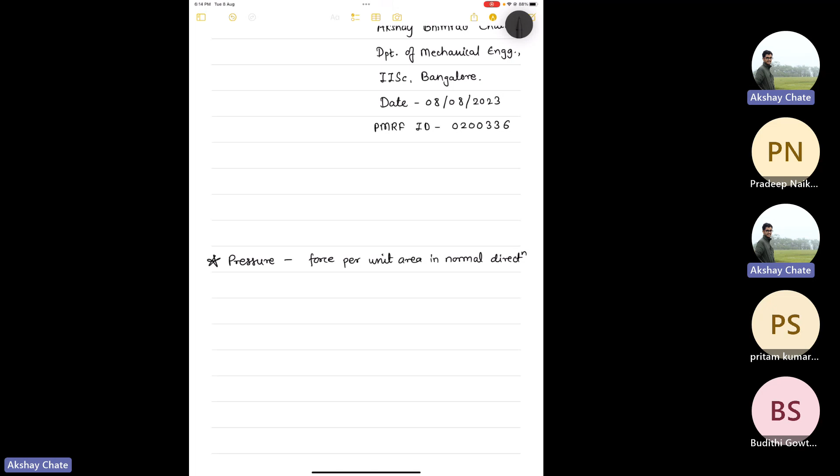So since we are discussing fluid statics, we have to discuss pressure because this is very famous: Pascal's law. Pascal's law says that when your fluid is at rest, pressure is the same at all points in the fluid. So that is Pascal's law. I hope you know that. First we finish the pressure. The definition is like this, and you should know some more things about pressure.

Pressure is scalar, because it is always... sorry, before I put it as a scalar thing, first I should mention that pressure is always compressive in nature. So when you say some pressure is exerted on something, it will always try to compress that thing. It won't be tensile or elongation. That would be a tensile force.

And therefore, as per Pascal's law, when the fluid is at rest, it has no direction. It is the same at all points, right? So you can assume it has no particular direction. So it is not a vector, it is a scalar. Therefore, pressure is defined as a scalar quantity. And there are standard units for defining pressure. One is Pascal, then there is bar, then there is torr.

But sir, it is always normal, so it has a direction, is it not? Since it acts normally, pressure is always normal to the object, so it should have direction also. So I should be careful with defining this. When I say it is a scalar, that is only valid for statics, and I am talking about inside the fluid domain.

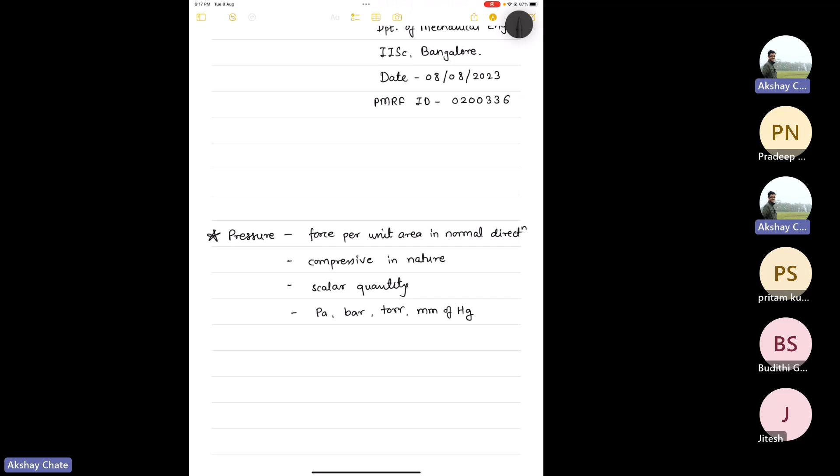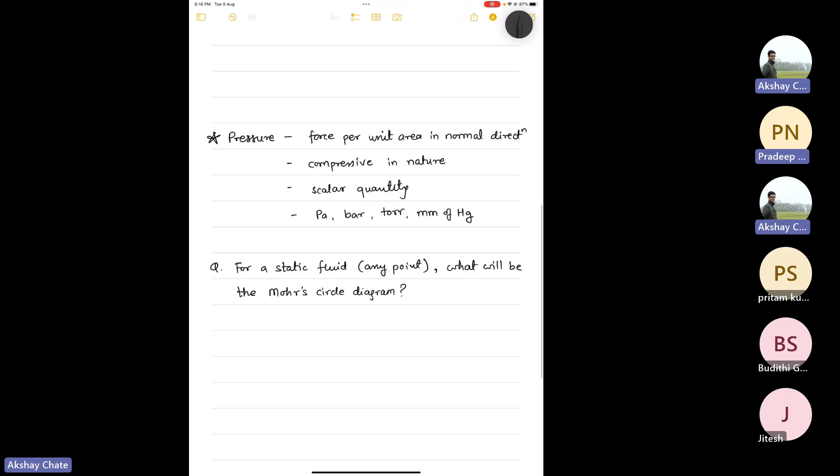So there is one very famous question: for any point inside a static fluid, what will be the Mohr's circle diagram? For those who don't know, Mohr's circle is used in solid mechanics to determine the resultant stress acting on any plane at any angle or orientation. It is a two-dimensional graph where on the x-axis you plot normal stress and on the y-axis you plot shear stress.

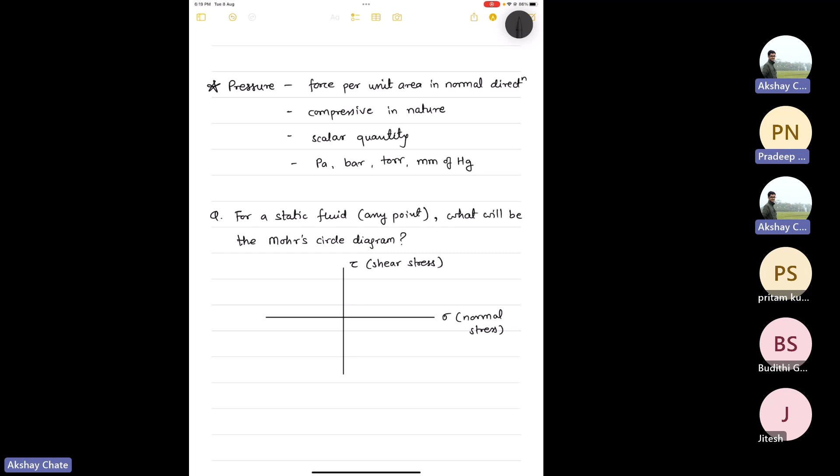Depending on how much normal stress and shear stress is applied at a particular location in a solid, you draw a Mohr's circle diagram, and typically it looks like a circle. I cannot go into depth because this is a fluid mechanics class. But the point is, this type of question is a combination of fluid statics and solid mechanics. If you know it, fine; if you don't, that is also fine.

The thing you should note down is on the x-axis we plot normal stress and on the y-axis we plot shear stress. So now, let's consider any point or some fluid domain like this.

So at any point inside the fluid, let's consider this point. If you see the direction of pressure, it is always compressive in nature, right? So it will be exerting force, pressure in this direction, always compressing it. And since this is a fluid at rest, there is no relative motion between the particles. So there will be no shear stress.

So now we know that this tau axis or y axis will be zero value. So our Mohr's circle diagram can only be a line or a point. It cannot be a circle because there is no shear stress. Now the next question is, when you consider normal stress, if you consider this as the origin, to the left of the origin it is compressive stress, on the right side of the origin it is tensile stress. So as we can see, pressure is always compressive.

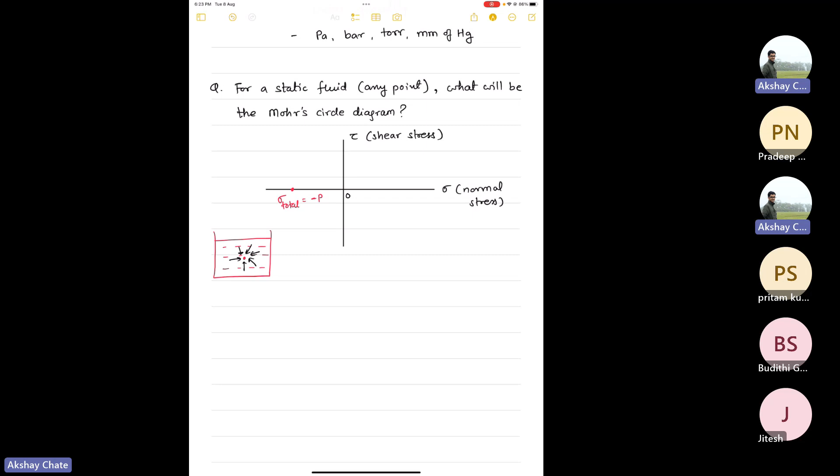Yeah, so see, this Pascal's law. We understand that pressure inside a fluid which is at rest is always the same at all points, but it has a very important application. So I'll just draw a simple schematic of it. You might have heard of something called hydraulics. I'll just draw a simple one.

Pradeep, one request: when you are not asking, can you just mute yourself because some background noise is coming. Yeah, thank you.

So what happens in many practical applications, you have a continuous system or fluid domain like this, and, for example, if you want to lift a car, a car is quite a heavy object, and to lift the whole car is not easy, at least manually. So you can use Pascal's law. And this will be a continuous same fluid all throughout.

So here, when you apply some force on this small cross-sectional area a, and this is the bigger cross-sectional area capital A, the particle inside the fluid will experience pressure because of the application of force, and that pressure will be compressive in nature, force per unit area. And the same pressure is transmitted throughout the domain at all points because the fluid is at rest, there is no relative motion in it. So at the other end, where the car is to be pushed up, the pressure will be the same, acting on this bigger area, and it can lift, let's say, mass of the car m.

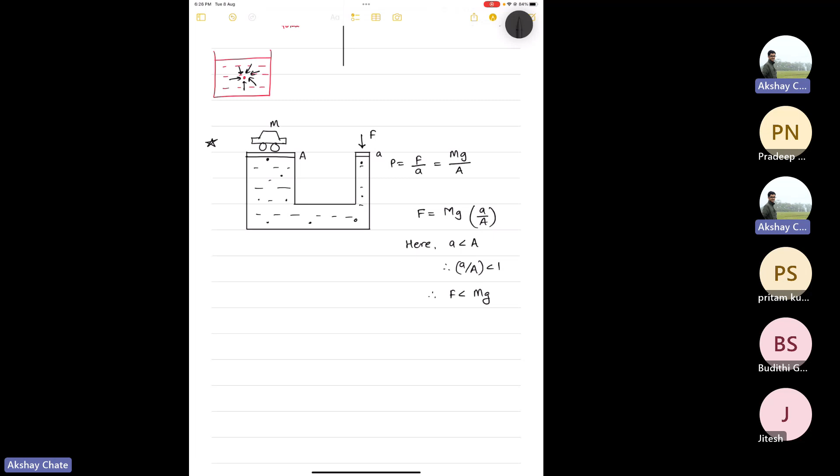So then sometimes they ask the validity of Pascal's law.

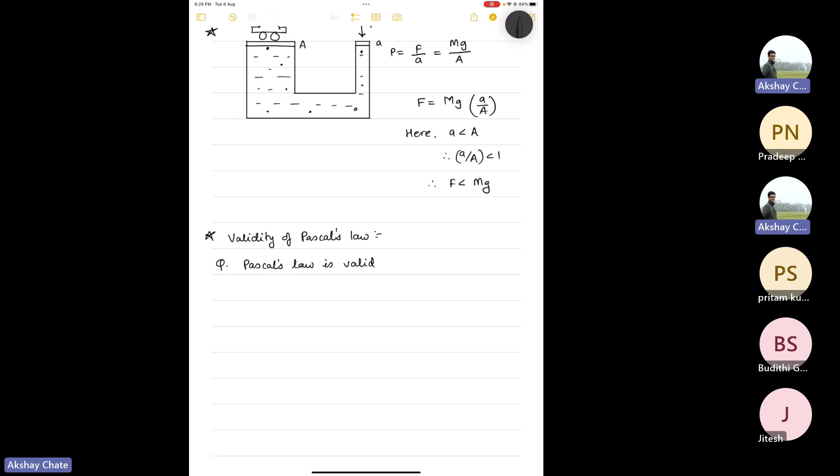So they will try to trick. The question may be, for example, I'll just give a question: Pascal's law is valid for... So there will be options like compressible fluids. Then there will be an option like non-Newtonian fluids. This we discussed in the last class.

Okay, this non-Newtonian. There are different types of fluids. The major fluids that are observed on the Earth's surface are water and air. They come under the Newtonian class of fluids. But there are some fluids which are non-Newtonian. You can go to the last class and see the notes or see the video. Then you'll understand what non-Newtonian fluids are. There are different types like Bingham plastic, thixotropic, something like that.

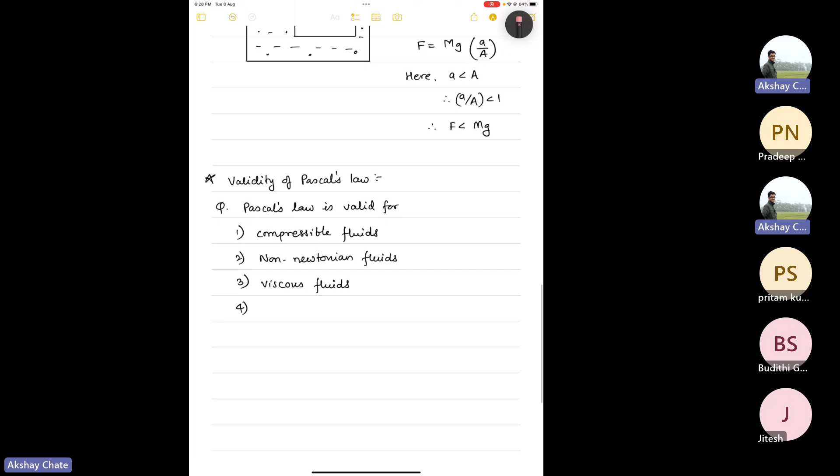So there are 2-3 types which are non-Newtonian, and maybe another option could be, let's say, viscous fluids, and the last one can be incompressible fluids. So, can anybody give me the correct answer for this question? Anyone? Budithi or anybody? I'm just seeing the name and that's why I'm calling. Is it incompressible, sir? Okay, so we have an answer which says option number 4, incompressible. Anybody else wants to take a shot at this?

Okay, so the thing is, the answer is actually all of the above, because Pascal's law doesn't say what type of fluid. It just says the fluid must be at rest or there must be no relative motion between fluid particles or molecules, whatever you want to write. But the idea is Pascal's law is independent of the type of fluid, independent of compressibility or incompressibility. As long as the fluid is at rest or there is no relative motion between its particles, it is valid. So actually this question is wrong.

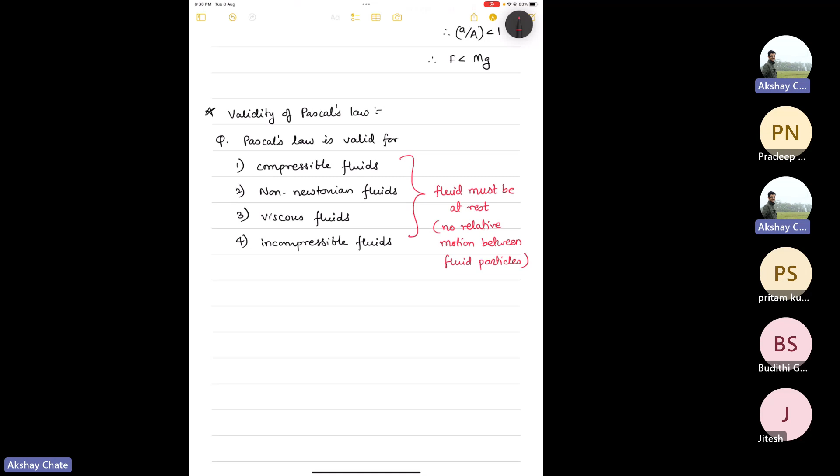The question should be: if the fluid is at rest, then Pascal's law is valid for what type of fluids, and the answer is all of the above. So that was a trick there. Actually, when I say the fluid must be at rest, everybody understands. That will be a stationary fluid in a tank or some container. But when I say there is no relative motion between fluid particles, a different case comes into the picture. Let's say, I'll just write the title: container and fluid moving with constant velocity.

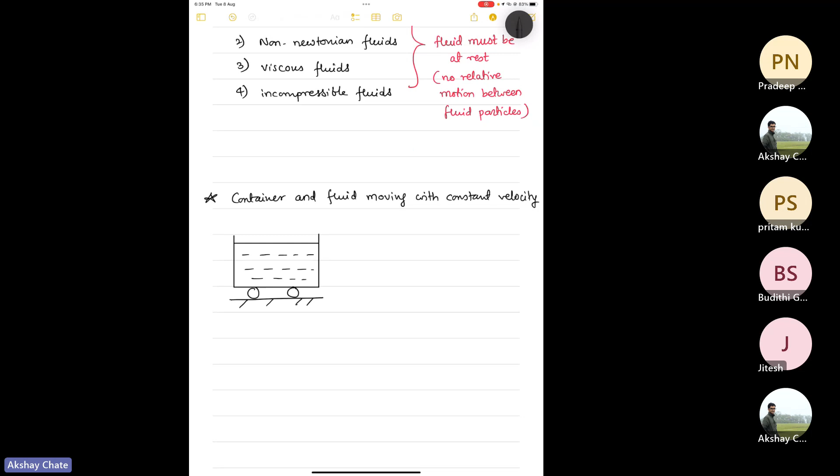Am I audible? Anyone? Oh, yes, sir. Yeah, actually, I was using Wi-Fi and it got disconnected in between. I'll just share my screen again. 1 second. I hope my screen is visible again. Yeah, visible. This meeting recording is going on, right? Yeah. Okay. Sorry for this internet issue. It was not my problem anyway.

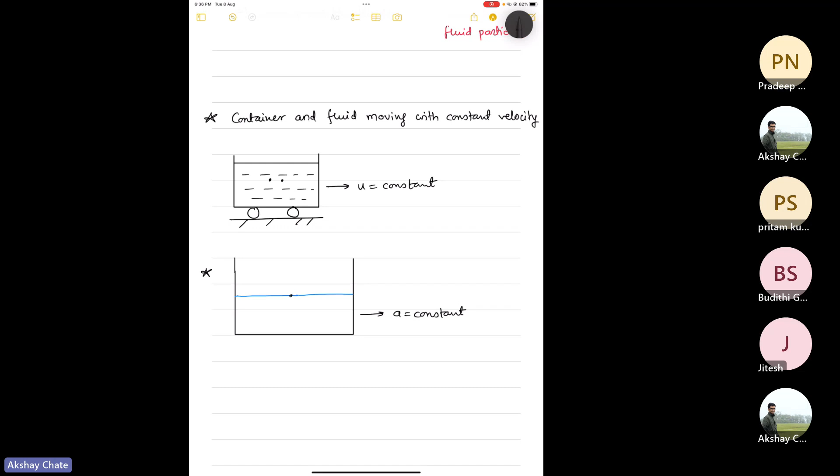So the first case is when your container and fluid are moving with a constant velocity, let's say velocity u. In that case also, there is no relative motion between two particles inside this fluid domain, so Pascal's law is valid in this case. Then there is a case where you have the same container, and let's say this was your initial level of fluid, and then it started moving at a constant linear acceleration. So in the first case your velocity was constant, and in this case your acceleration is constant. When your vehicle accelerates at a constant acceleration, the liquid level will not stay horizontal. The liquid will shift slightly to the backside because of the acceleration.

Pradeep, can you just mute yourself for a second? Background noise is coming.

So in this case also there is no relative motion between two particles inside the fluid, and therefore Pascal's law is valid for this case also. But not all motions are linear, or in an XYZ direction. There can be rotational motions also. So I'll just give you two cases. There is a container like this, a cylindrical container.

Please forgive my drawing. One case could be... 1 second. Yeah. So there are two cases in case of rotational motion. So one case is you have a cylinder, and it is having constant angular motion. For example, if this is its axis of rotation, let's say it is rotating about this axis, and if it is rotating with a constant angular velocity omega,

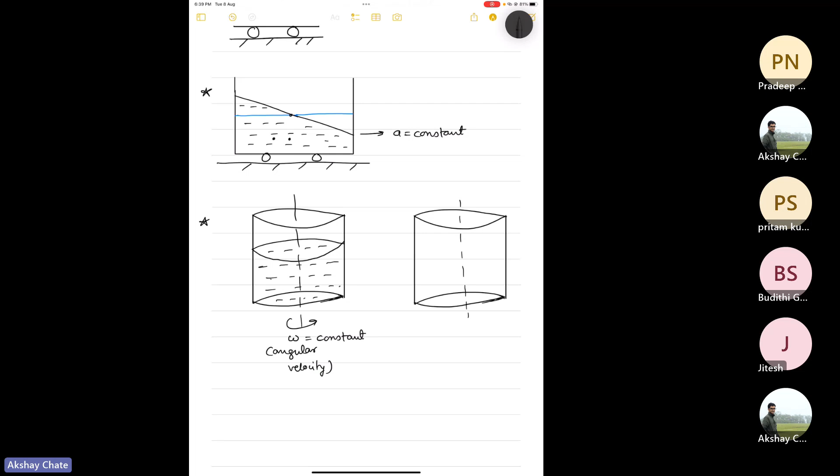But the last case, where let's say this thing is rotating about this axis with constant angular acceleration. So in this case, there will be some interface like this or maybe some other shape. But the thing is, when something is rotating at a constant angular acceleration, then there is something called Coriolis acceleration forces, and those forces make relative motion between the fluid particles. So therefore, Pascal's law is not valid in this case.

All other three cases where you have linear motion, where your velocity is constant, acceleration is constant, and even in case of rotational motion, when your angular velocity is constant, Pascal's law is valid. But if you have constant angular acceleration, there Pascal's law is not valid because of Coriolis forces. So please keep this in mind.

This question is not yet asked in any competitive exams, as far as I know, but it can be asked in future. So when somebody asks when Pascal's law is applicable or valid, you can say when the fluid is at rest, or when it is moving with a constant velocity with its container, or constant linear acceleration, or constant angular velocity. And based on that, we'll take one example.

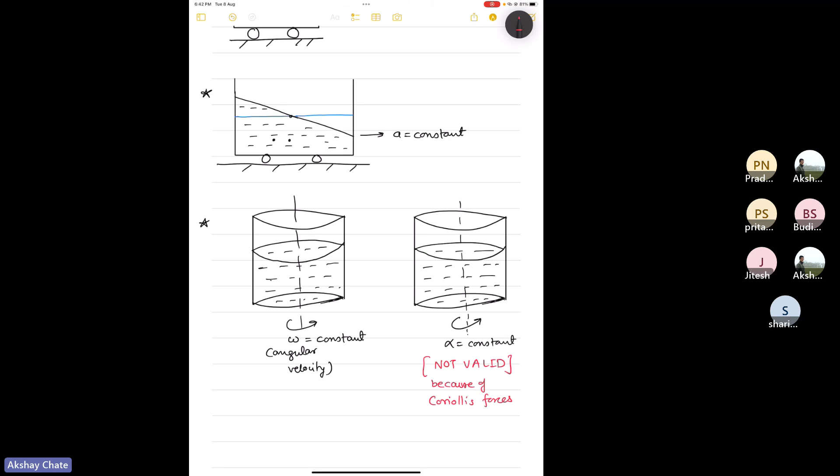Before that, just give me 1 second, because there is a small derivation to get the angle of this thing. When the fluid moves with constant linear acceleration, the interface shifts slightly backward when the fluid is accelerating in the direction as shown in the second figure here. So by what angle this thing moves is the question. Okay. So for that, there is actually a very simple derivation. Let me just check if I find it, or maybe you can refer to it in any standard book. But the formula that comes out of it is the important one.

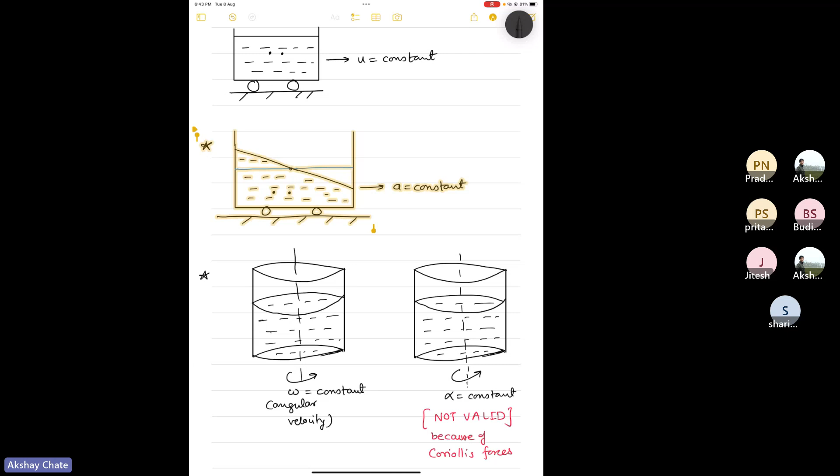1 second, I'm just looking for the derivation. Is it available with me at this point? Yeah, so basically, the derivation goes like this. I'll just copy this image if I can. Okay, something is... Okay, anyway, I'll draw it. I think it is not copy pasting. So, actually, we are taking some more time than required. Anyway, we'll just move on with this. This is the last part here.

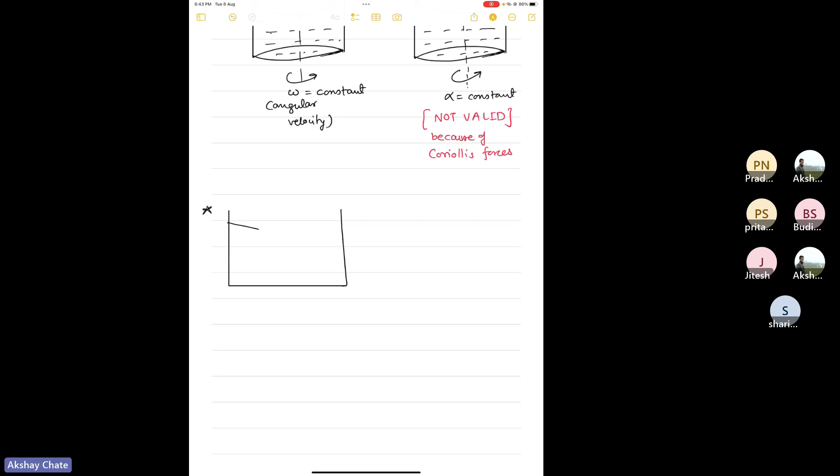So, earlier the liquid level was this. Sorry, it should cross at center. So, somewhere here. Let's say it is accelerating in this direction with constant acceleration. If the acceleration is variable, then also Pascal's law is not valid. Okay, keep that in mind. Only for constant acceleration it is valid. So what you do, you take a small fluid element in this fluid domain, and maybe you can just zoom in and see what happens there. So here,

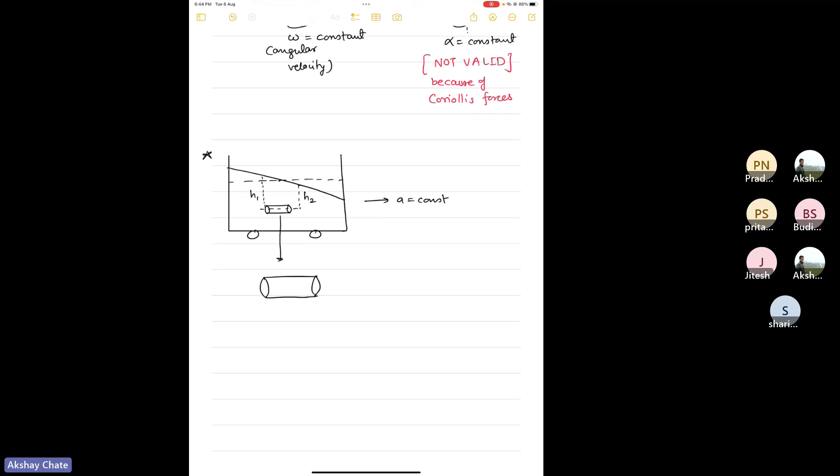what happens? Let's say this end is at h1 height and this is at h2 height. And since this is a small elemental area, we'll consider its length as dx. And let's say this angle, the angle by which the surface is slanted, is called theta. So in that case, what happens?

If you draw the free body diagram, there will be pressure forces acting on this element, and we are not considering gravity and other viscous forces because the fluid particles are at rest. And since this element is horizontal, there is no gravity force variation along it. So as per Newton's second law, the sum of the net forces acting on this element will be equal to its mass into acceleration.

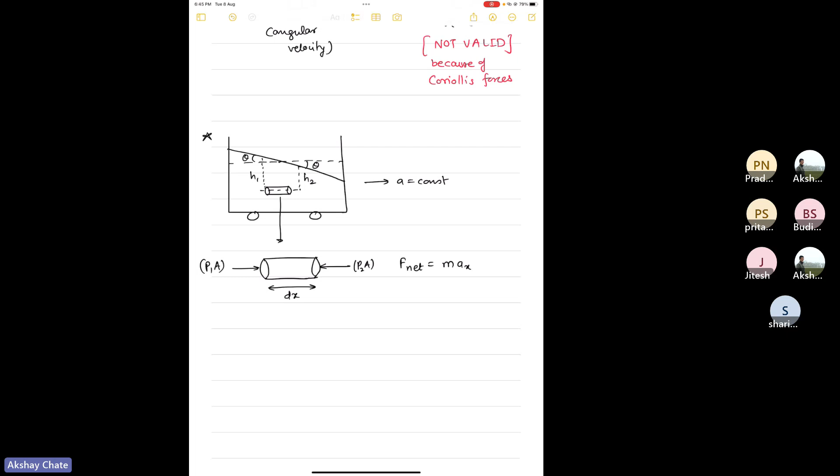Consider an area in the horizontal direction. Let's say there is a pressure P1 acting on this area A, and similarly P2 acting on the area A. P1 and P2 will not be the same. If they were the same, the fluid interface would have been horizontal, as in the case of constant velocity. But here, since there is acceleration, there will be a change in pressure.

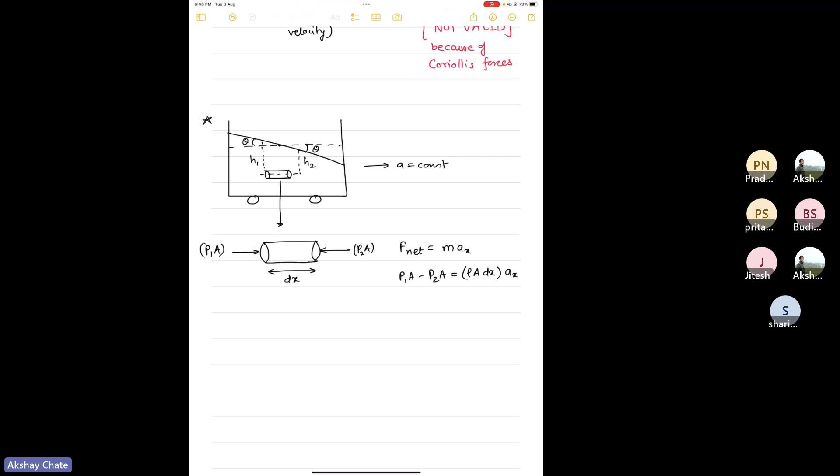So, what is the net force in the x direction? It will be P1A minus P2A equal to the mass of the fluid element, which is rho A dx, into ax, right? And by the law of hydrostatics, we know pressure is equal to rho g h. So you can write rho g h1 A minus rho g h2 A equal to rho A dx into ax.

So if you cancel rho and A from both sides, you get h1 minus h2 into g equal to ax into dx. If you rearrange the terms, ax by g will be h1 minus h2 divided by dx. Now look at the geometry of the figure; from geometry this comes out to be equal to tan theta, which is the angle by which your surface is inclined. So when you want theta, you take tan inverse of ax by g.

I'll not do the derivation of the second case, where along with constant acceleration in the x direction there is constant acceleration in the y direction as well. In that case, if ay also exists and is constant, theta becomes tan inverse of ax divided by ay plus g. You need to consider the direction of ay and g. If ay is in the upward direction it will be plus, and if downward it will be minus, because gravity is always downwards.

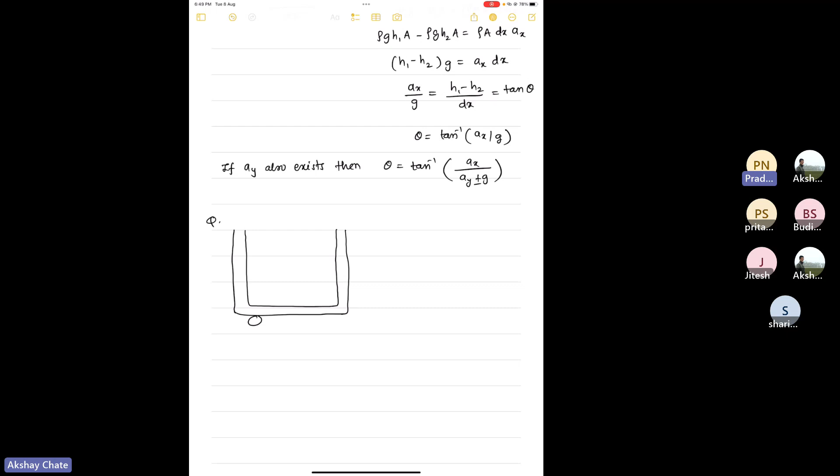So we'll take one question which is quite a standard question in this context. There is this U-tube type of thing, and it has wheels, and it is moving with constant acceleration. Just 1 second. So this U-tube is moving in this direction, and the acceleration is constant. I'll use a different color for showing the liquid. The liquid level is like this in the U-tube.

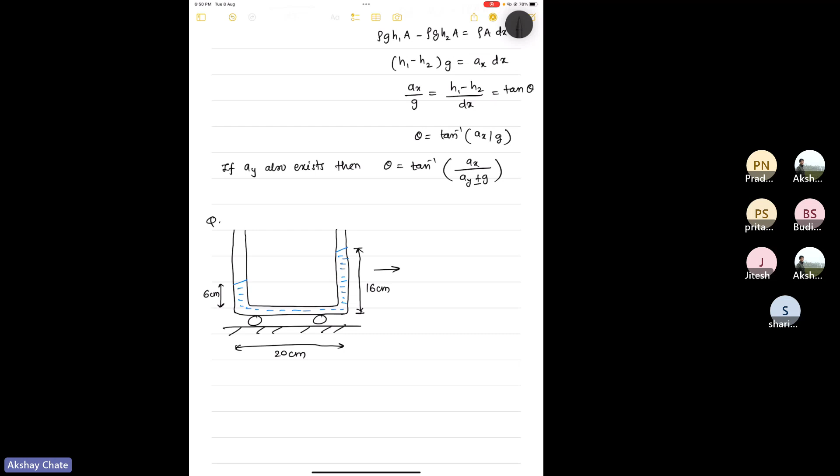The blue color represents the liquid. The horizontal length is 20 centimeters. This height is 6 centimeters, and this is 16 centimeters. And the question is, you have to identify which of the following is correct. I have seen this question in maybe 2-3 places when I was preparing for this lecture, so you should pay attention to this type of question.

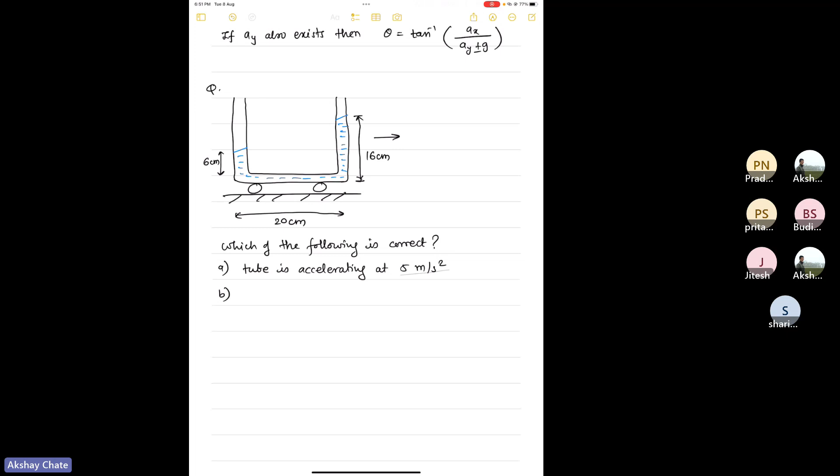So the options are: A, the tube is accelerating at 5 meters per second square. Can I copy this, because the options are the same? The second option is, the tube is accelerating at 2.5 meters per second square.

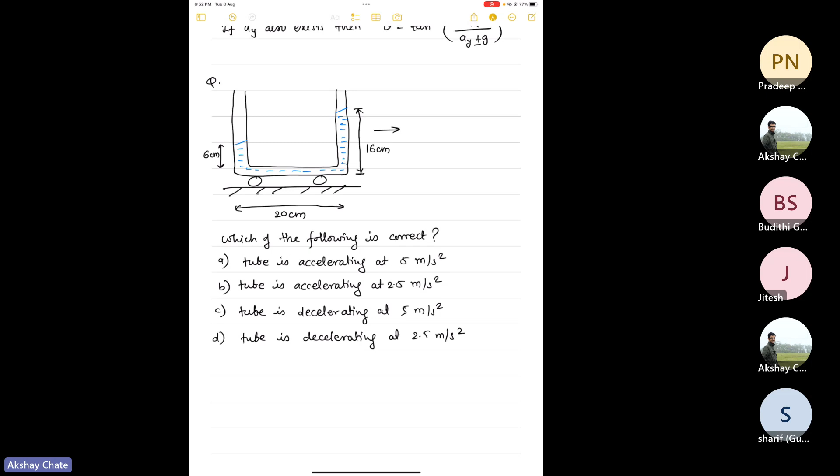Third option is, the tube is decelerating. 1 second, I made a spelling mistake, it should be E. Decelerating at 5 meters per second square. And the fourth option is the same, only the value is changed: the tube is decelerating at 2.5 meters per second square. So, can anybody answer this question?

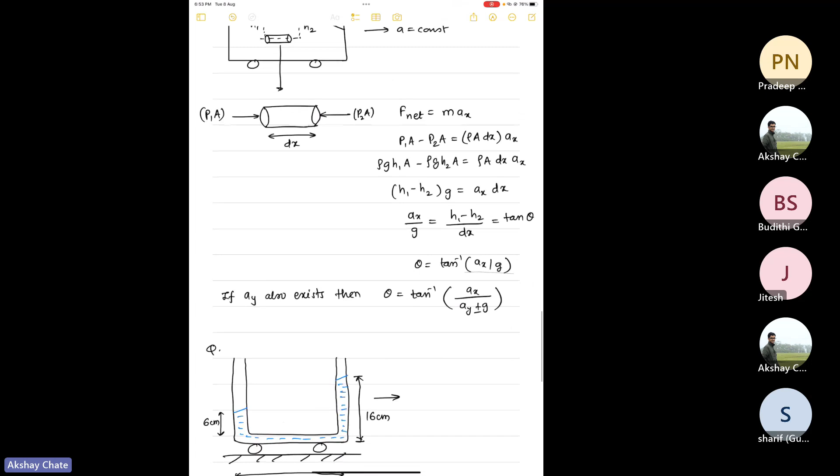It is actually quite straightforward, similar to the derivation of tan theta we did some time back. But there is a small catch. If you can catch it, that's a good thing. If not, we'll see. In all these cases, your objective should be to find tan theta, and since this is exactly the same as our derivation, tan theta is ax by g. But here you have not been given ax.

But from this figure you can calculate theta. If I join these two interfaces, this angle will be theta. So what will be tan theta from the figure? It will be 16 minus 6 divided by 20, which is 1 by 2. So ax will be g by 2. g is typically taken as 10 meters per second square, so ax will be 5 meters per second square.

But now there are two options with 5 meters per second square as the acceleration, option A and option C. So Pradeep, can you tell me, out of A and C, which one you feel is correct by looking at the geometry of the figure? Sir. A, sir. A.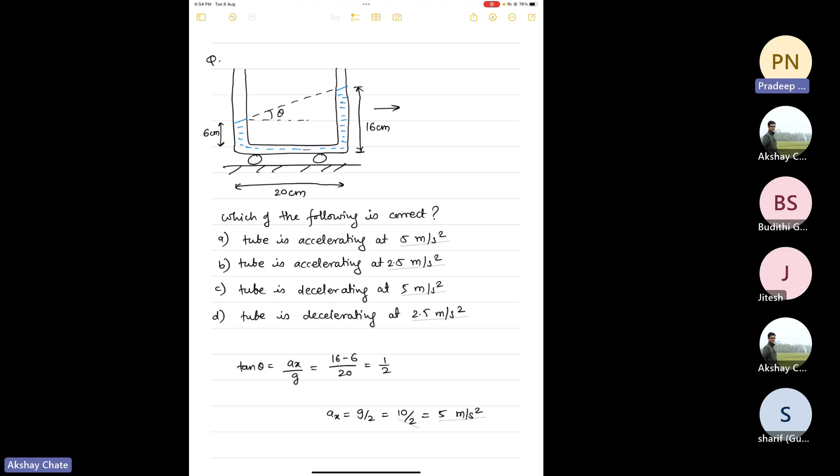No, that was the trick in the question. See, in this question, when the fluid was accelerating, liquid shifts to the back.

Because if the liquid is accelerating, it should look like this, the figure shown here. But when the fluid will decelerate, the front part will be

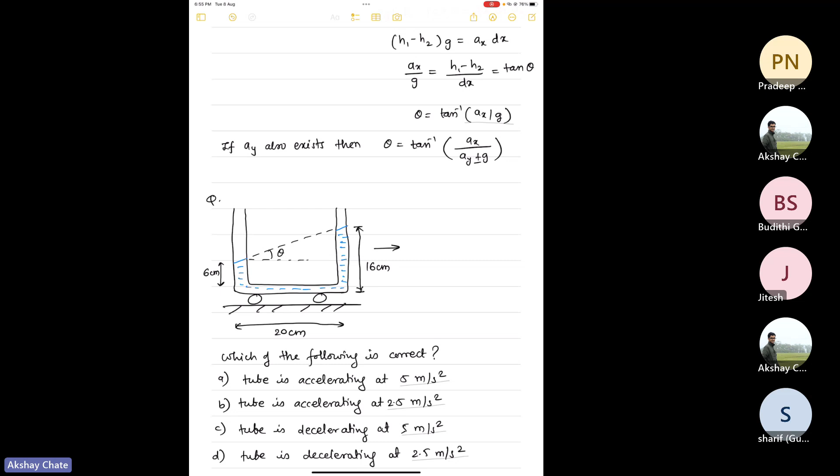having higher height than the back end. Because let's say you are moving with a constant velocity. When you started accelerating, the fluid will feel the push, so it will go back. And when you apply the brakes for stopping, the fluid will feel the force in the opposite direction, so it will be on the front side. More liquid will come to the front side, and therefore the correct option is option number C.

Tube is decelerating at 5 meter per second square. So that was the trick behind giving this question. Typically what I have observed is many a times we study the acceleration case, but we don't study the deceleration case, and that's where examiners catch you in some competitive exams somewhere.

Okay, so this thing is okay. Pascal's law is done. After that, we go to this thing - pressure measuring devices. There is a whole class of devices there.

But before that, can anybody tell me what is... okay, I'll ask it in the question format. Which of the following is correct?

Okay, so this is regarding the gauge pressure and absolute pressure question. This concept is also very important because many times we don't understand this, and if in any interview you get confused between absolute pressure and gauge pressure, trust me, it will not go good for you. So, okay, coming back,

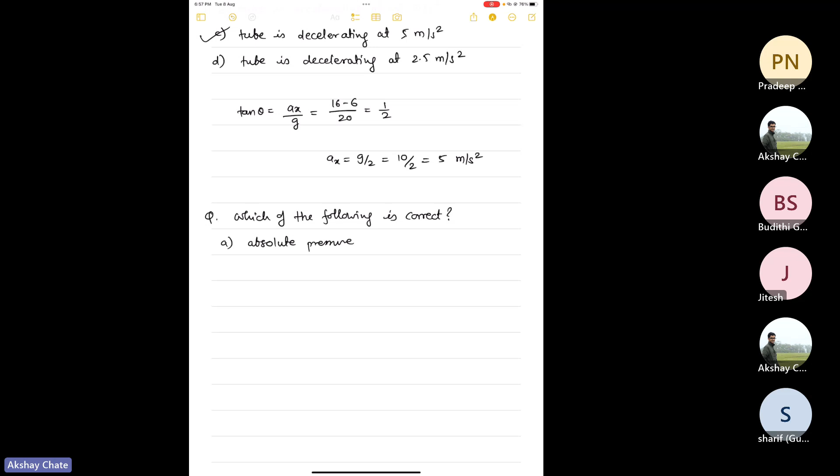Let's say absolute pressure greater than gauge pressure. So I'm giving you certain scenarios, and you have to tell me, instead of correct, which of the following is practical or feasible, or maybe I should just say realistic. So first guess is, can the absolute pressure be greater than gauge pressure, or reverse of this?

Can the absolute pressure be less than gauge pressure? And can the gauge pressure be less than 0? And can absolute pressure be less than 0?

So this is a multiple choice question, multiple options are correct, and maybe none of them are correct. So anybody? Sharif is typing. He says option A. Okay, option A.

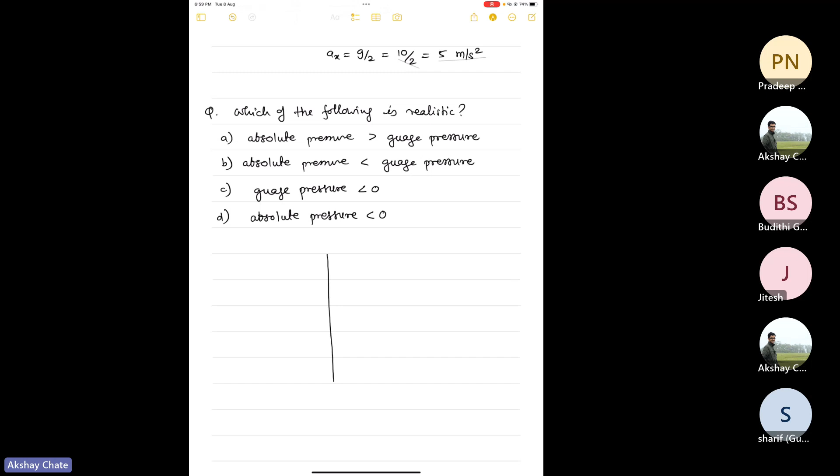Okay, so yeah, I'll just draw the figure, and that will clarify this thing. Whenever you have confusion like this, it's better to stick with some sort of figure in your mind, because that way you learn clearly. So let's say this is a zero pressure.

Pressure is equal to 0, and let's say this is equal to the atmospheric pressure, 1 bar. This gauge pressure and absolute pressure, they are defined with respect to the atmospheric pressure at that location. So if you are at sea level somewhere, then there will be atmospheric pressure of 1 bar. But if you are at some hill station, atmospheric pressure may not be 1 bar. So it's not correct to write the value here. I'll just write the atmospheric pressure, which is locally available there.

One second, I'm just... how should I say this? I'm just looking at explaining this thing in a crisp manner.

So basically, this gauge pressure, as the name suggests, it is a pressure shown by any gauge. And in earlier times, there were gauges which were used to get the pressure, but they were not giving you the exact value of pressure.

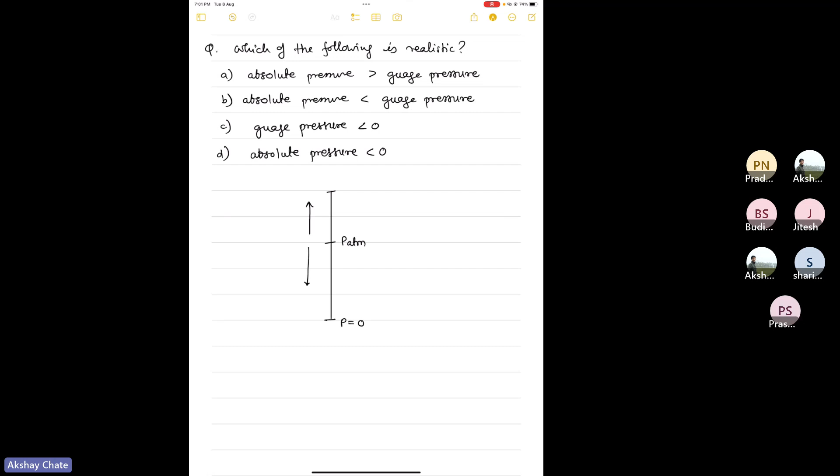What they were giving you is the value of gauge pressure with respect to the atmospheric pressure. So gauge pressure can be there, or gauge pressure can be this also. One second, maybe I'll use another color so that you'll understand. Let's say I use blue for gauge pressure. So gauge pressure is always defined with respect to the atmospheric pressure.

So if at any location your pressure is more than the gauge... one second, I'm getting a call, one second.

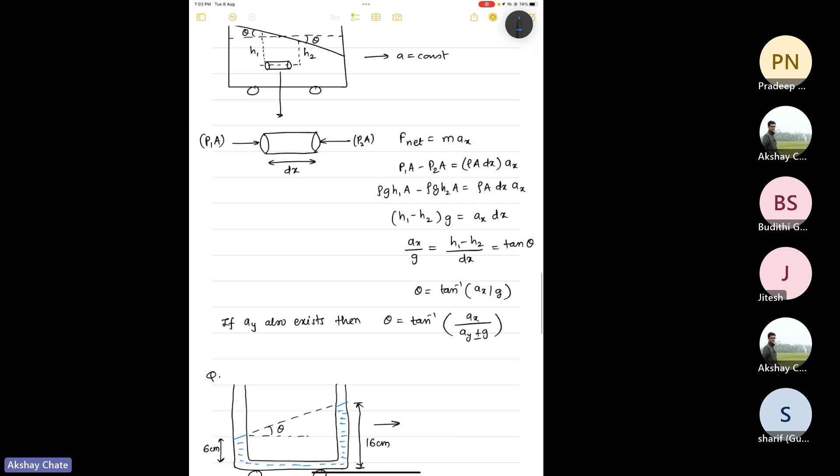Gauge pressure is always defined with respect to atmospheric pressure. Gauge pressure can be more than atmospheric pressure or it can be less. Absolute pressure is an absolute value. So, as you said, absolute pressure is always greater than gauge pressure. That is correct.

Absolute pressure less than gauge pressure? No, that is not correct.

Gauge pressure can be negative, since it is with respect to atmospheric pressure. So it can go below atmospheric pressure, which is called vacuum. You must have heard this term somewhere. In outer space, they say it is a vacuum. There, the gauge pressure is minus 1 bar, and absolute pressure is 0.

So gauge pressure can go below 0, but absolute pressure can never go below 0. It can be equal to 0 in a theoretical or highly idealized case, but it can never go to a negative value, so this option is also wrong. So option A and C are correct.

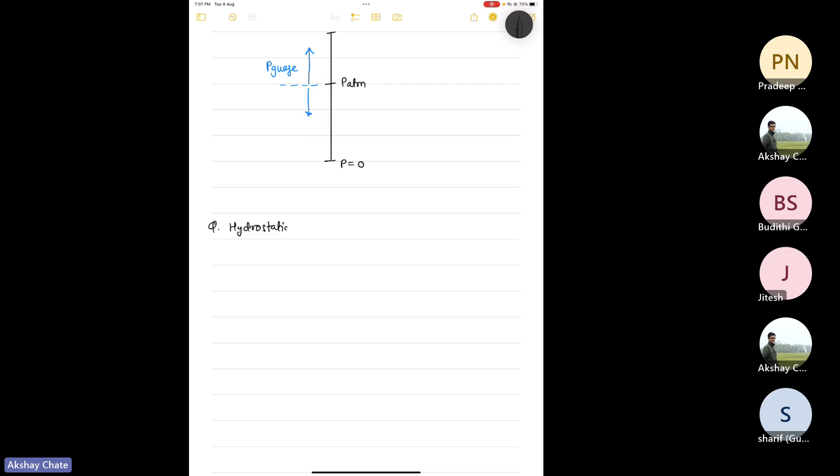Understood? Yeah, so there is this thing - maybe not a question, but we don't have time to go into the details of this - there is something called the hydrostatic paradox.

You guys can look into it. It's actually very counterintuitive. What it says is... let's say, have you heard of this hydrostatic paradox? Anyone?

I think it is in some textbooks also. If you have, just let me know or type it out. If you haven't, I'll briefly explain it. We have not gone through it.

Okay, so basically, let's say you have some random shape like this, and you fill liquid till this level, let's say water, and you put one pressure gauge here, not on the top actually. There it's atmospheric pressure.

This is the free surface symbol, an inverted triangle. If it shows on any surface, that means it's a free surface, so there will be no shear force, only gravity or normal forces there. It's just a symbol. Then there is some container like this, and another container like this. Please forgive my drawing, but all of them are at the same base level, same ground levels, and fluid is filled to the same height in each of them. So this is the free surface.

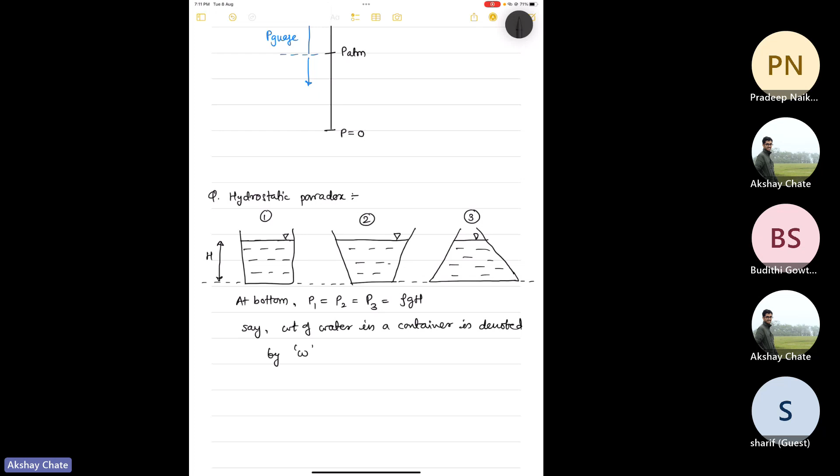So what I mean is, where this paradox comes into picture is, pressure is same in all three cases, but when you do the force calculations, what you observe is in case of the first container, the weight of the liquid in the container is equal to the net force at the bottom of the container.

In case of the second liquid, the weight of the liquid is greater than the force at the bottom. And in the third case, what you observe is the weight of the liquid in the container is less than the force at the bottom.

Assuming here that this bottom area, all of them have the same area. It may not look like it in the figure, but assume we have constructed those containers such that they have the same bottom area. So see how you calculate force.

Force F1 will be P1 into A1, right? And F2 will be P2 into A2. But A1, A2, A3 are same, and since pressure is also same, the forces F1, F2, F3 are same.

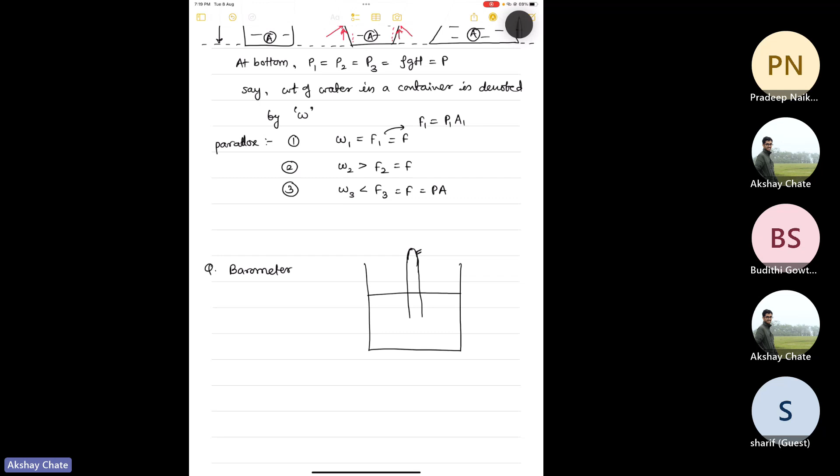And initially you have some outlet here. You evacuate the tube, there is no air or anything, and you close it afterwards. What is observed is that the liquid in the container rises up to a certain height, let's say h. This is open to the atmosphere, no other complication, and there is vacuum at the top. So the liquid rises. Now the question is, what is h?

So here you use the fluid hydrostatic law to measure the atmospheric pressure. The whole point of asking this question is this: most students who study fluid statics know what a barometer is, but where they get confused is this. Point number 1 is here, point number 2 is here, point number 3 is on the surface, and point number 4 is inside the liquid down somewhere. Can you see this? It's fine, sir. Okay.

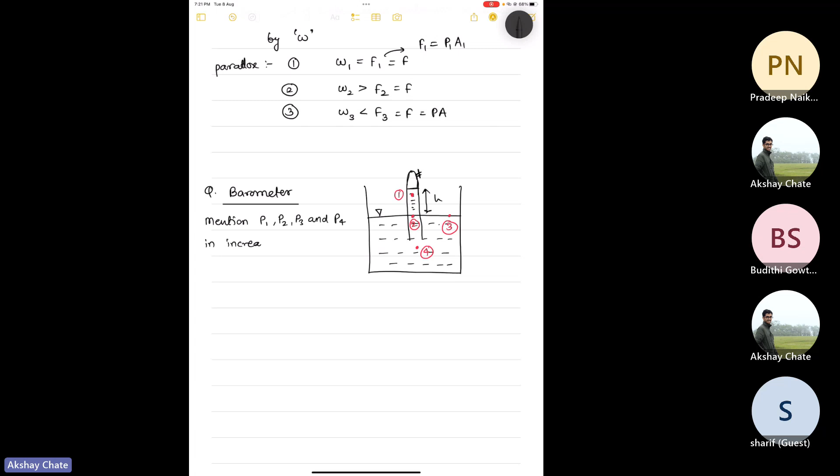So typically the question asked is: mention pressure at P1, P2, P3 and P4 in increasing order. Can anybody tell me the increasing order of pressures? Anyone? You can type it out also, I am seeing the chat on my mobile.

See, P3 should be a no brainer. P3 is equal to atmospheric pressure. Since you have studied fluid statics, as we go down in a liquid, pressure increases by rho g h, the hydrostatic pressure. So for point number 4, let's say the depth is A. Then P4 will be P_atm plus rho g A, because you are going into the fluid. So P3 and P4 are okay.

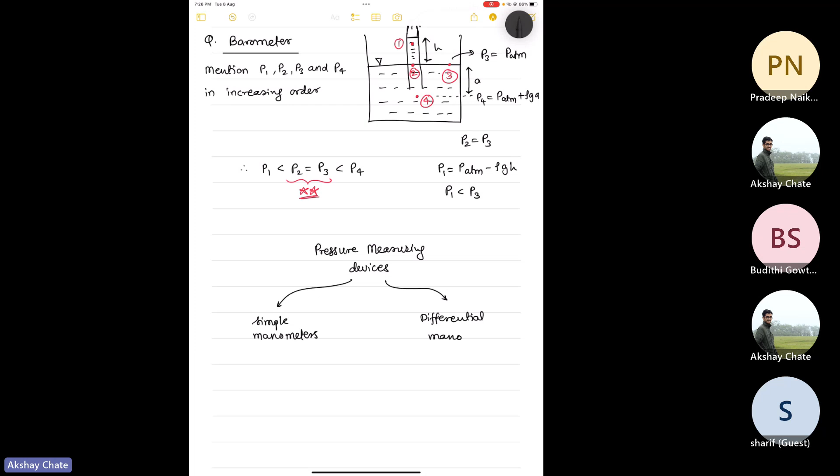These are simple manometers and differential manometers. Simple manometers will always give you gauge pressure. Then you need to consider the atmospheric pressure at that location, and then you'll get the absolute pressure. And differential manometers give you only the pressure difference between 2 points. You don't get the absolute or gauge pressure here. That's why they are called differential manometers.

Then there are two types in this. One is called the U-tube differential manometer, and one is called the inverted tube differential manometer. Okay. And here there is something called a piezometer, and there is something called a typical U-tube manometer. Actually, we are running low on time because there are other things to discuss.

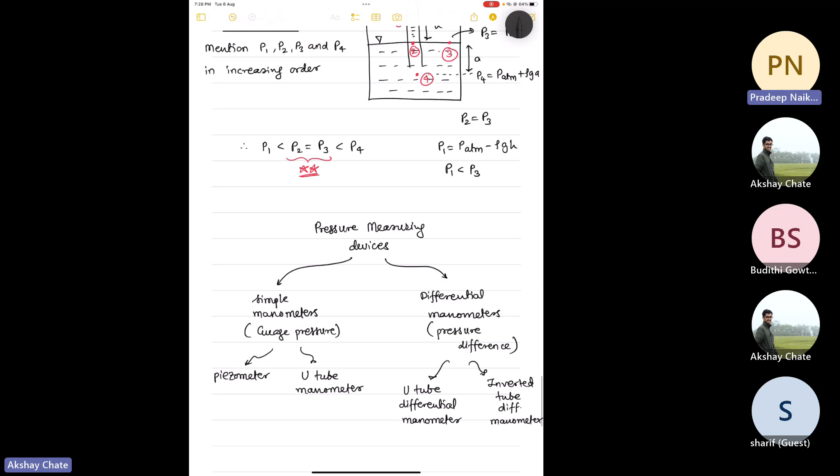Sir, can I ask a question? Sir, what is the difference between piezometer, barometer, and manometer? Okay. The last one is which manometer? U-tube manometer. But no, sir, this piezometer, manometer, and barometer, the three terms. Barometer is like this. A barometer you use for measuring local atmospheric pressure at any location. Understood? Yeah, yeah. Whereas a piezometer looks something like this.

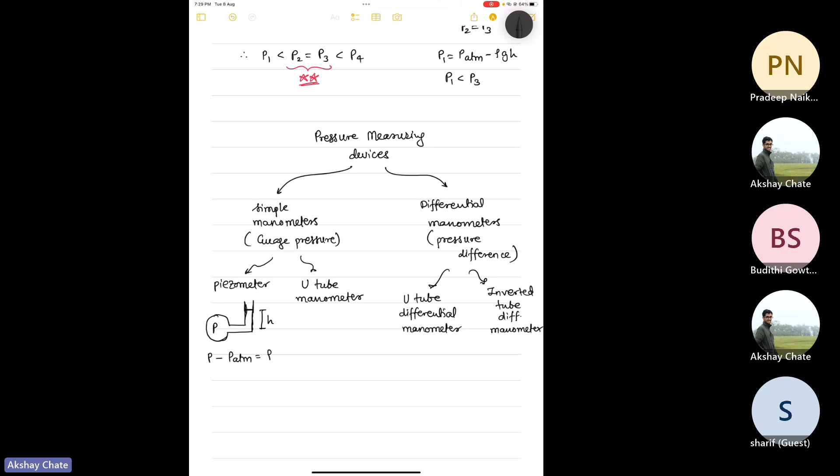There will be a pipe through which your fluid will be flowing. And you just take out a tube like this and let it be open to the atmosphere, in case of a piezometer. There will be some pressure inside the pipe and you let that fluid come up to some level. Whatever this height H is, that is your gauge pressure. Basically, the pressure inside the pipe minus the atmospheric pressure will be rho gh. So here you get the gauge pressure, because this is atmosphere plus some rho gh value, and rho is the fluid flowing through that pipe. This is the cross-sectional area.

So a piezometer gives you gauge pressure, and the disadvantage is that this piezometer cannot measure negative gauge pressures. If in a pipeline or container the pressure is, let's say, minus 50 kilopascal or something like that, you cannot use a piezometer, because when you open it to the atmosphere, the atmospheric air will go inside, and eventually everything will be at atmosphere. So the piezometer is only usable if your pipe is at a pressure higher than atmospheric pressure. And one more thing, you cannot use it for gases, because if you open it to the atmosphere, the gas will just go out. It is only used for liquids.

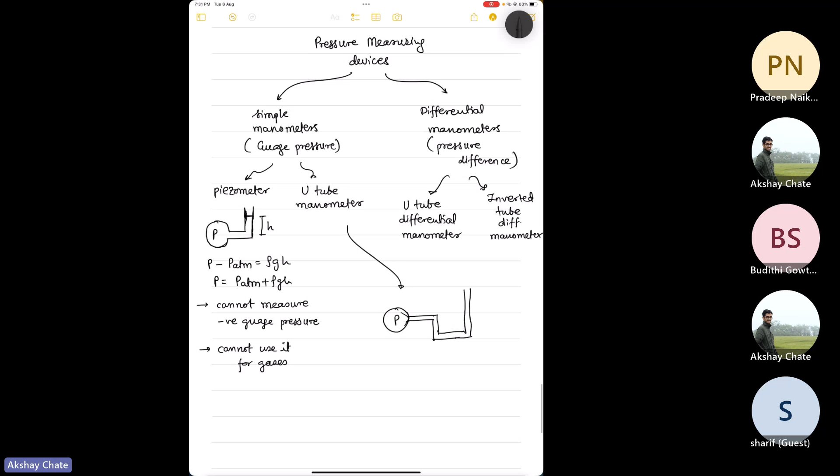And if the liquid flowing through the pipe has very low density, you will have to provide a very high pipe, or this H will be very large because rho g H is there. To see a significant variation you need a high H, so that becomes a problem sometimes. Whereas a manometer looks something like this. You have a pipe with some pressure P. Then you put something like this, and you put another type of liquid in between. This blue line represents another type of liquid. It can be mercury, it can be water. It depends upon your application.

In this case it is advantageous because now you can measure negative gauge pressures also, as long as the mercury doesn't go inside the fluid. That care you need to take when you design the U-tube. And you can use it for gas also, so there is no problem there. And since mercury has very high density and very low vapor pressure, the deflection will not be that high, so the vertical limb of the U-tube manometer is also not that long. So the U-tube manometer is a suitable choice, or better alternative to the piezometer.

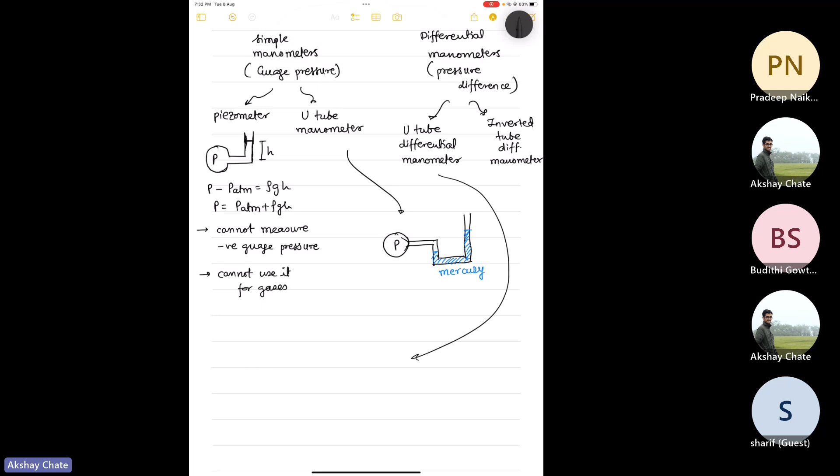And in case of differential manometers, if I just show you like this, as the name suggests, differential manometers give you a difference between, let's say, pipe A and pipe B. You take out the bleeds from both of them, connect some U-tube like this, and put mercury inside it, and then depending on the deflection between these two levels, you get the delta P. So basically you get PA minus PB equal to rho g H. This will be your H, and this is something like mercury.

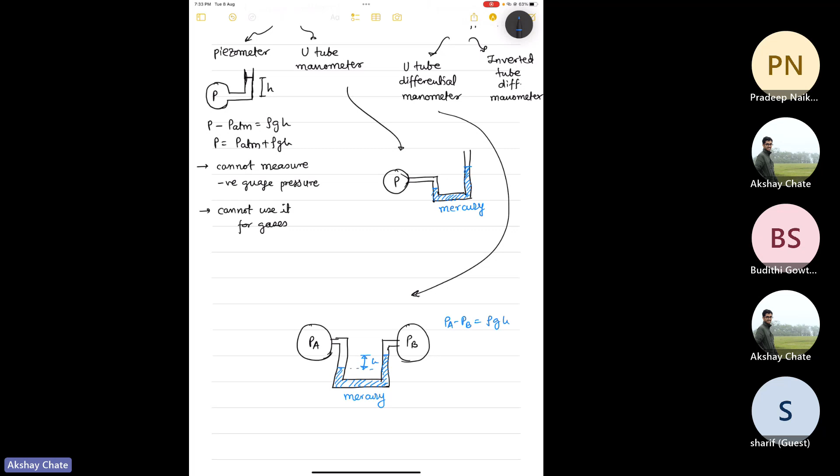And when you say inverted tube manometer, differential manometer, instead of U-tube like this, you just put it in the vertically opposite direction, so ulta. So in that case, you don't put mercury in, you put very light fluids like air or gas inside there. So like that. So am I clear?

We'll take one example for this. That may be a good idea, because many a times these questions are asked in GATE and competitive exams. So I'll take one example. So this is a two question example. Okay. So you have a U-tube, but it is having not two branches. It is having three branches like this, and all of them are open to atmosphere.

But you know, there is mercury filled in this part. There is mercury, and here you have some water also filled inside. This is water. This is 27 centimeter, and then

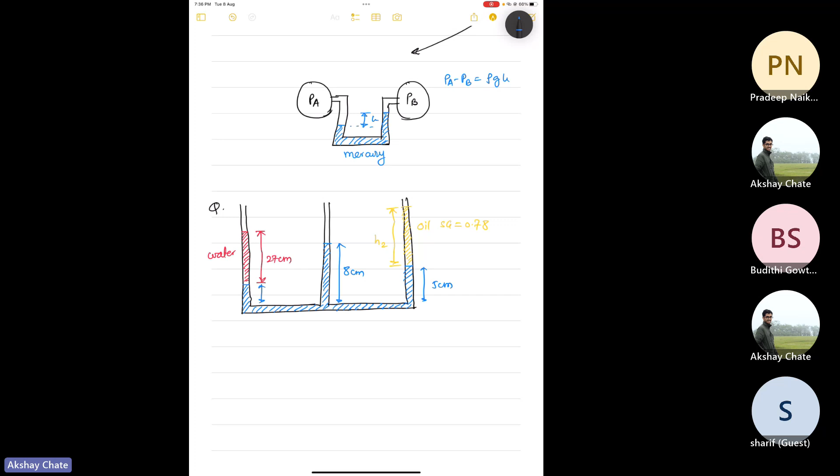Yes. So and this mercury, some dimensions are given. This is 8 centimeter. This is 5 centimeter, and this is unknown. So this is H1, and this is mercury. So now it is a two-part question. First is what is H1 and H2, and second is if specific gravity of mercury is 13.6,

1 second. Oh, actually, this question is what is H1 and H2. That was in two parts. I've written both of them here only. 1 second. I have written the whole question, but I forgot to. 1 second.

Yeah. So, what is first of all? Can anybody tell me what is specific gravity? When I say specific gravity, actually we are running low on time, so I'll only tell. So it is a density of any fluid with respect to any reference material. So for liquids, we use water density as a reference, and for gases, we use typically air as the reference.

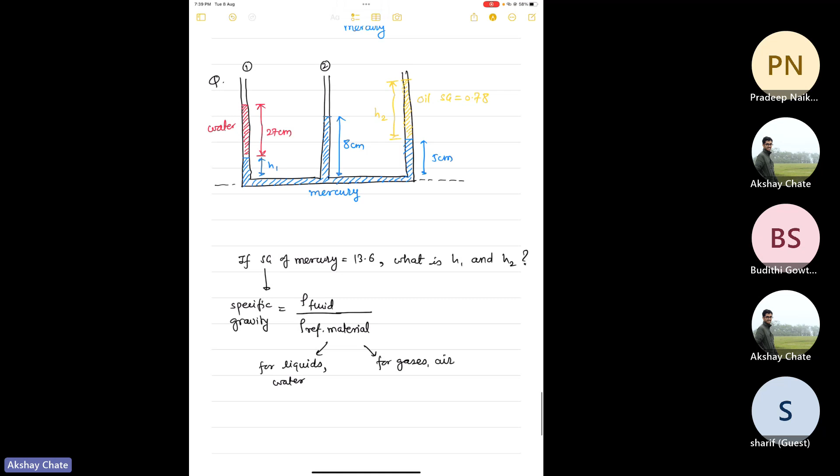So this is a classic example of application of fluid statics. So what you do, you consider this baseline, then you calculate the total pressure in all the limbs. So I'll number them 1, 2, and 3, right? So in first limb, let's say this is a P at bottom, PB. So you start from the top. At the top it is atmospheric pressure. Then you have water column of 27 centimeter. So rho of water, G, H of water.

Then you have mercury column of H1 height. So rho of mercury, I'm denoting it by M subscript. And then you have H1. And that will be equal to your bottom pressure, right? And then you have second limb in which you only have mercury. So P atmosphere plus rho of mercury into G into 8 centimeter. So we'll just keep it in centimeter. If required, we'll change it. And that will be equal to the pressure at the bottom line.

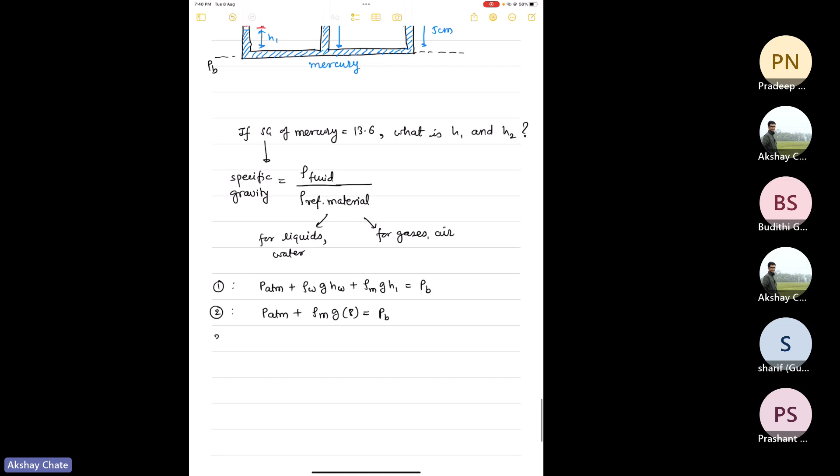For third limb, it is atmospheric pressure. Then you have some oil of specific gravity 0.78. So its density will be 780. So you have oil of rho O, G, and its height is unknown, H2. Plus we have some mercury of 5 centimeter. So then we add rho of mercury G, and it is 5 centimeter, equal to the pressure at the bottom.

So now we have three equations, and how many unknowns? H1 and H2 are unknowns. So you do some algebra. So let's consider equation number 1 and 2. From 1 and 2, what you get: rho of water into G into H of water plus rho of mercury into G into H1 is equal to rho of mercury G into 8.

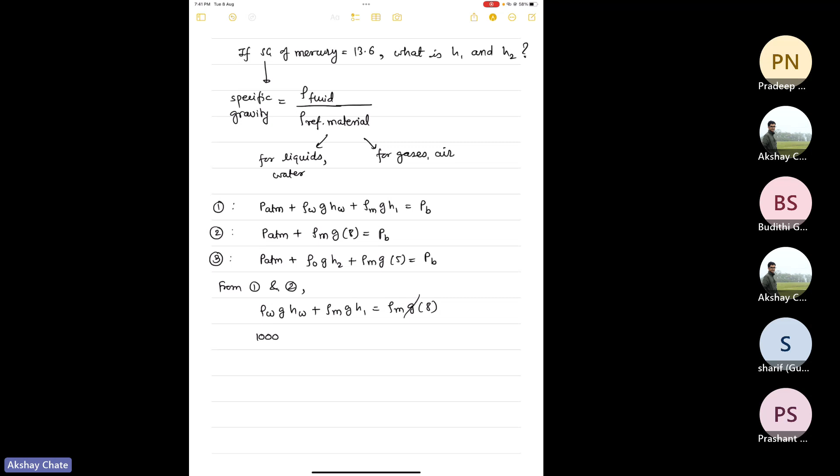Okay, I hope this is understandable. I'm skipping one step here because it is very understandable that we are eliminating PATM and PB from the equations, and we are just taking whatever is the difference. So here rho of water is 1000, and G is also common to all, so we can eliminate G here itself. H of water is 27 centimeter

plus rho of mercury is this much into H1 is unknown, and rho of mercury is this much to 8 centimeter. Here you can see the only unknown remaining is H1, and that should be equal to 13.6 into 8 minus 27 divided by 13.6. I'm skipping some steps here, but you can do the algebra. And if you do that, 13.6 into 8 minus 27 divided by 13.6, you get 6.05 centimeter. So that is the answer to your first question.

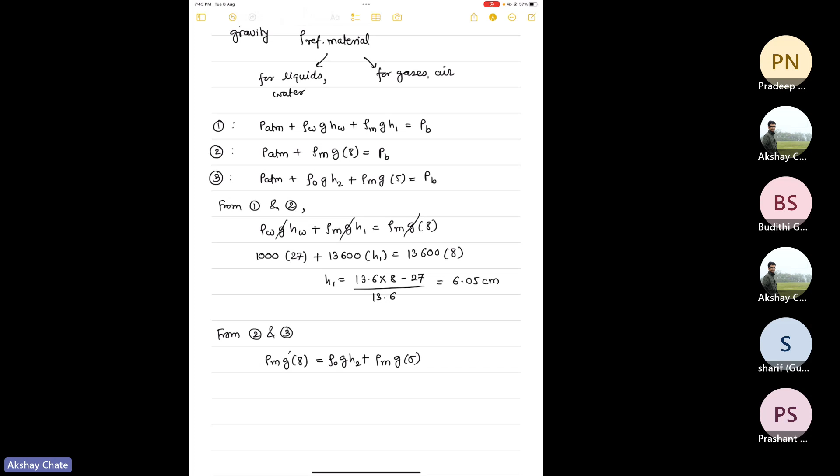And from 2 and 3, it is also the same. Here the unknown will be H2. So what you do? Rho mercury G into 8 is equal to rho oil G into H2 plus rho mercury G into 5 centimeter. So here also you cancel G because it's common to all. And then from here itself you can write, H2 will be rho M into 8 minus 5 divided

by rho O. So that is again 13.6 into 3 divided by rho O, which is 0.78, I think. Yeah, so 0.78. So if you do that calculation, 13.6 into 3 divided by 0.78, it is around 52 centimeters. So this is how you do the calculations for these type of questions.

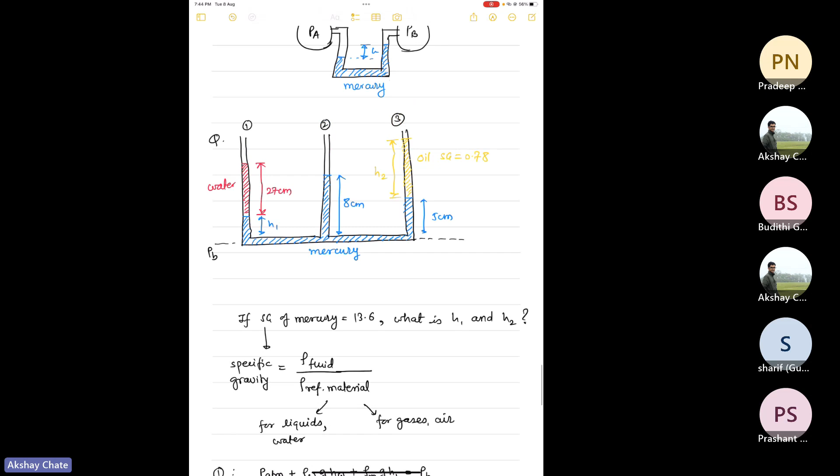You will find a lot of variations of these questions in multiple exams or many subjective exams also. So I hope you can solve them. The only trick in all this type of question is to find a level where you will have same pressure on both sides, and then you just start from one end and do the calculations.

Actually, I can take one more example from here, but then our time will be over, and we have this other type of problems that is still remaining, which is called buoyancy and flotation. Actually, covering fluid statics in one class of 2 hours is very difficult because there are a lot of things here.

So, what do you guys want to do? Should we go to the next part, or you want to take one more example of it? I think this is understandable, right? This fluid statics and manometers part. I think we can go to the next part, force balance and all that, hydrostatic pressure. Shall we do that? Anybody? Or should I take the call? Yes, sir, you can go ahead. So you understand this, sir.

Okay, so next is, many a times you will see some examples like, there will be some liquid level, free surface like this, and there will be some gate at the bottom. So it will be all fluid, and this gate will be hinged at some end, and it is kept shut by applying some force. So they will ask what is the force that is required on this end.

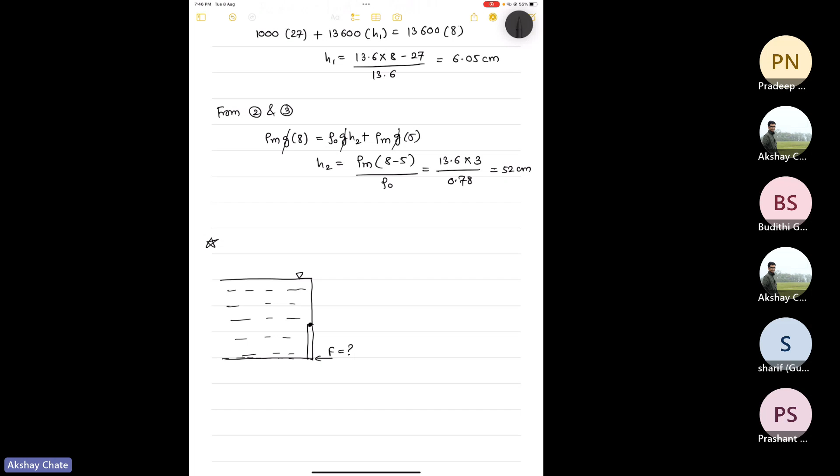So something like this will be the ground level. So what is the force that we need to apply at the end so that this gate won't open and water won't come out? Or maybe in some cases you want that gate to open. For example, if it is a dam and the rain is quite heavy on some particular day, the dam cannot sustain. Let's say this is a dam wall. There will be some safety limit for that wall. Above that, if the water level goes, it is not good for the structural strength of the dam.

So in that case, you design the gate in such a way that after a certain height of the water above the gate, let's say H, it will open. Because the force that is applied at the gate from the water, let's say F dash, will become greater than F at this height, and it will open. So that is like a safety mechanism for a dam.

And in some cases straight gates are not possible. In some cases you may have curvatures. For example, you may have something like this arrangement. One second. Yeah, so instead of the gate at the bottom, I can just copy this thing, right?

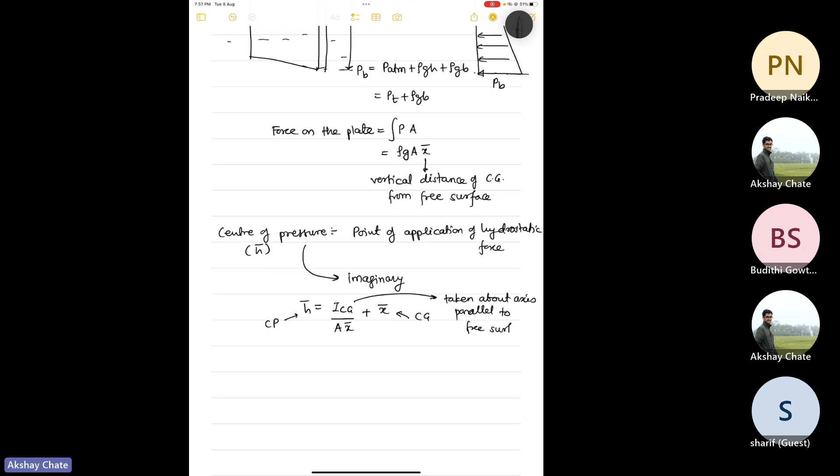Like that. And then another case is there: if this flat plate is vertical, like in this case, it is considered as vertical, but what if it is at some angle theta with the free surface? In that case, this formula gets slightly modified. There will come a sine square theta term here. Other than that, it remains the same. So theta is the inclination of the flat surface with the free surface.

So see, the important thing that I want to mention here is, yeah, one thing I mentioned, the center of pressure is an imaginary point. It's not a real point. Sometimes this question is asked in the exam: let's say you are at very high depth, maybe 2 kilometers down the sea level, inside the ocean, and you put a flat plate there. What happens to the center of gravity and the center of pressure as you go down? Do they move? Do they remain at the same location?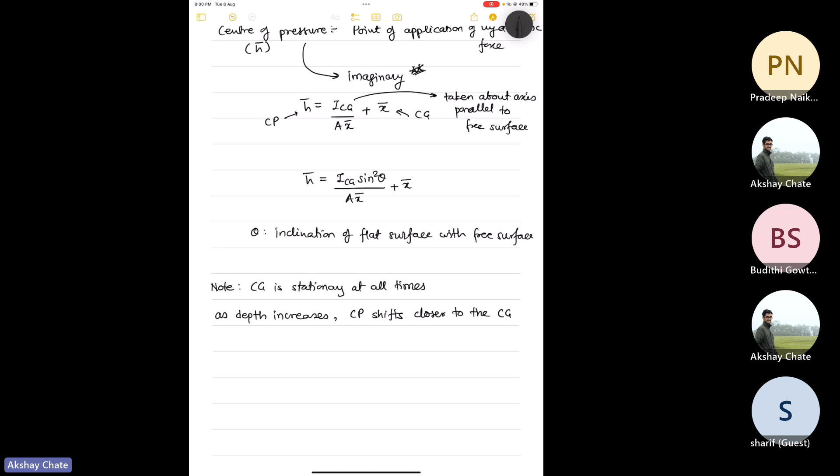So it's a very important note that the center of gravity is stationary at all times. As depth increases, the center of pressure moves closer to the center of gravity. The center of gravity cannot move, because it is a measure of the mass of the plate. But the center of pressure is a measure of the total hydrostatic force acting on the plate. So as the depth increases, the center of pressure shifts closer to the center of gravity. That is the important thing to note here.

And one more thing to note, because typically we encounter flat plates: for a flat plate, CG is at h by 2, or maybe I'll not use h because h is used somewhere else. In this case I used B. So CG will be B by 2, CP will be 2B by 3, and ICG is typically dB cube by 12, where d is this dimension. You can do numerical calculations, we don't have time, but for a flat plate you should remember the CP is at 2B by 3 from the top. These are all from the top of the plate.

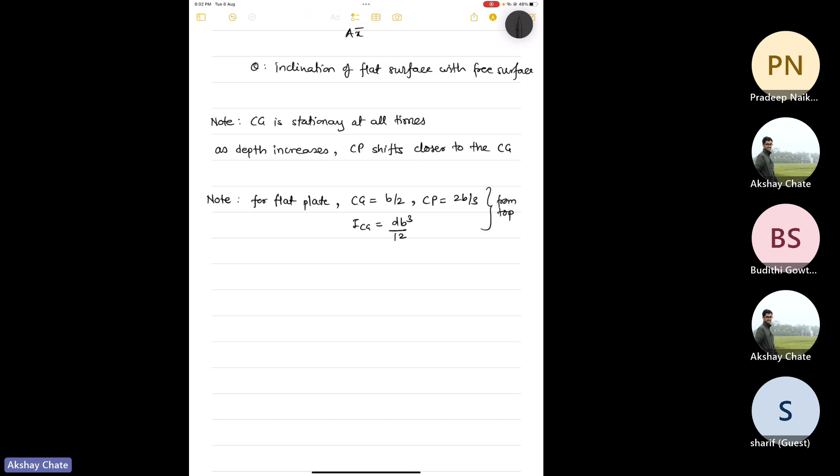So like that. Then we move on to the curved surfaces. Unfortunately, we are running out of time, so I cannot take examples at this point. Maybe you can go and solve some numericals. If you have any issues, you can ask me in the next lecture or next Tuesday. But just for the sake of completion, let me complete the curved surfaces also.

So in case of curved surfaces, let's say you have a liquid level till here, a vertical wall, and then a curved surface like this, and this is the ground. This is the fluid-filled domain. I'll just make it slightly thick. This is the gate for the curved surface where you are calculating the forces. As I told you earlier, it will have horizontal and vertical force directions. For the horizontal direction, we just take its projection in a horizontal plane, and it will look something like this.

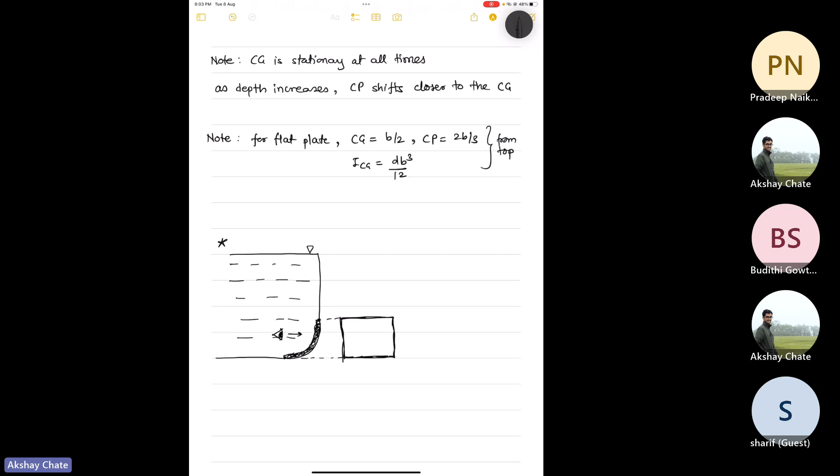So basically you are looking at this gate from this side, so I'm drawing an eye here. Looking at this gate from this side, what you see is a flat plate like this. Then you do the usual calculations as done for the flat plate case. In that case, your Fx will be again rho g A x bar, and it will act from the CP. Understood? So this will give you Fx, the horizontal force.

But for the vertical force direction, what do you do? One second. Maybe I'll draw the eye here. For the vertical force, you draw an imaginary line from the curved surface you are considering, like this. Whatever liquid is inside this, that will exert the force in the y direction on the gate, and it will be equal to the weight of the liquid in this red shaded area, and it will act through the center of gravity of this shaded area.

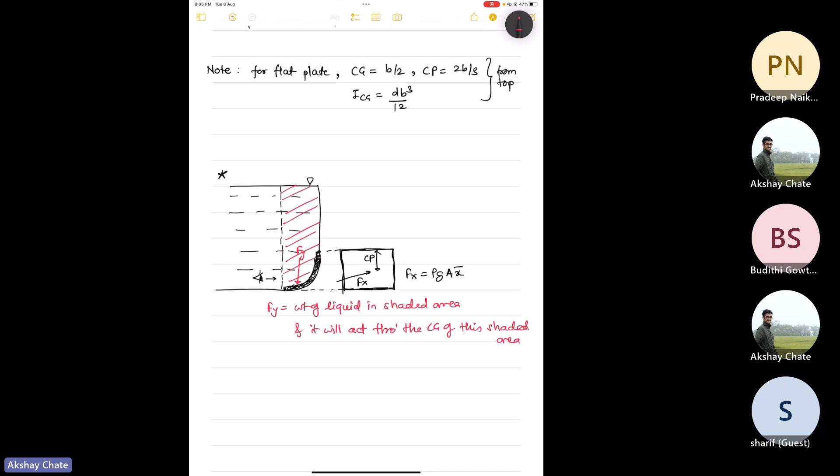Okay, so let's say it comes out somewhere here. Some mathematics is involved in this, but you can do the calculations, and some data is required that will be given in the question.

So what happens if you consider this curved surface again separately? There will be a horizontal force acting something like this, and there will be some vertical force acting in some fashion like this, and they will act through these points mentioned here. So what you do, you take the resultant force of them, you take the vector resultant, and you get the net force acting on the gate.

So its magnitude will be root of fx square plus fy square, and it will act through tan theta, which will be fy by fx - standard two vector resultant. So that is there.

Unfortunately, because of the time, I am not able to take an example, but there are very interesting questions that can be asked from this type of area. I will request you to go home and do some problems, and maybe next class, if you have any doubts, I'll answer them. Otherwise, we'll see, because right now we don't have time.

One quick question, sir - so the material of the gate will not matter?

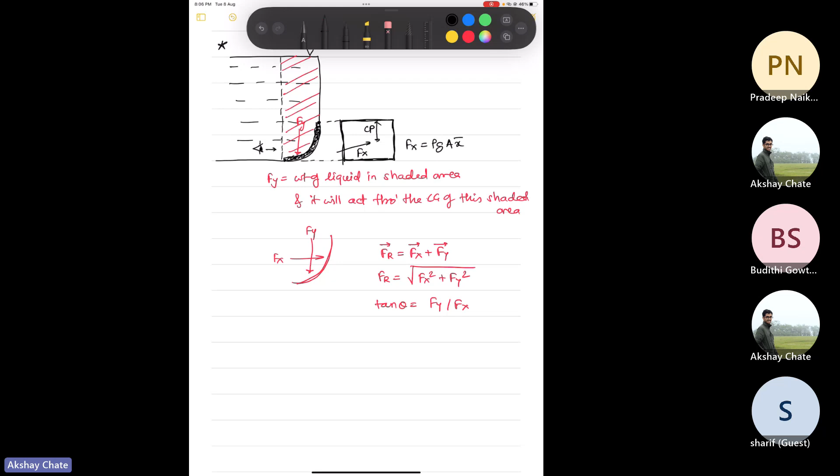It will matter, but not in these calculations. It will matter when, let's say, if it is a very light gate, it won't matter. But if it is a very heavy gate, then its own weight will act, in the downward direction, something like this, and that weight will act through the center of gravity of that gate. So when you want to do the final calculations, as to how much force I want to apply so that this gate won't open, at that time you need to take the moments of all these forces about some point, which is the hinge point from where the gate opens. So in that case, the gate weight you can consider, but not for the calculation of hydrostatic forces, not for this part what we discussed.

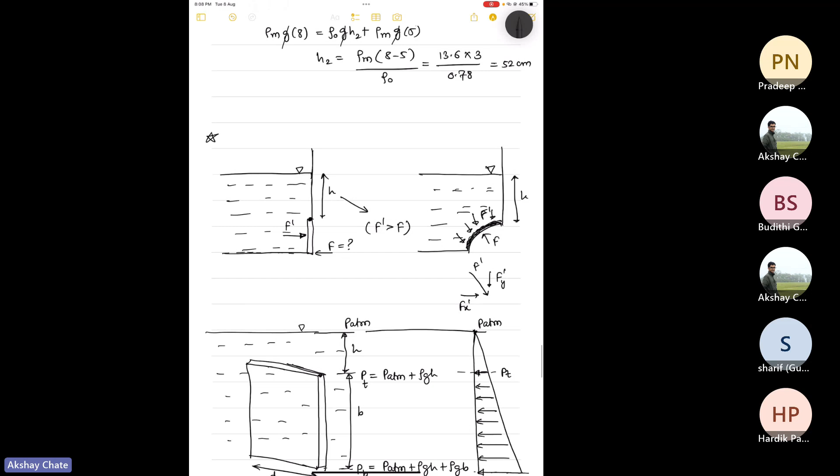So there it won't be considered, but in the final calculations where you want to calculate - I told you here, right - you want to calculate this f dash, which is the force at which your gate opens. So in that calculation, the mass of the gate should also be included. So that is included there.

Yeah, and then there is this last part - I'll just briefly give you the gist of it. So then there is this concept called equilibrium conditions. Give me 5 minutes, I know I am over time.

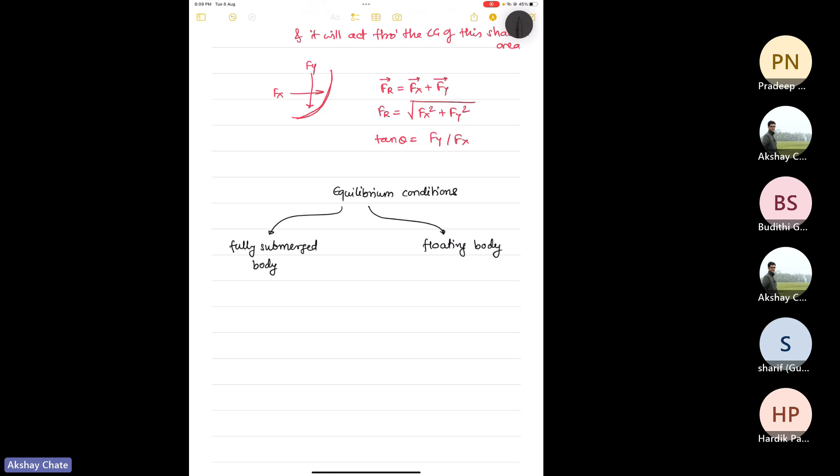So there are two types of classifications here. One is fully submerged body, and another is floating body - so the body is at the surface, floating. There are cases where... right now we don't have much time, so I think I'll stop here. Maybe in next class I'll spend some time on these concepts. But right now I think we are over time, so I should better stop here.

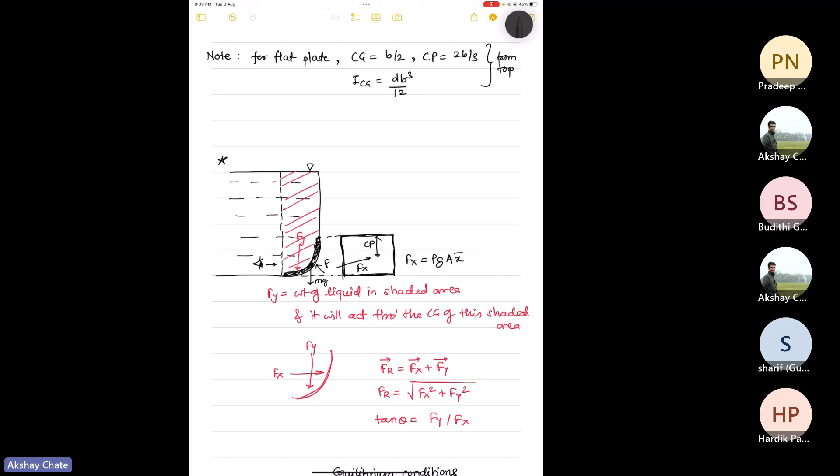So we have a question that the hinge is on the top, sir. Hinge is at the top. There is a question - actually, I'll just show you the question next time. Yeah, actually, I should have taken some problem on this part, but unfortunately not now.